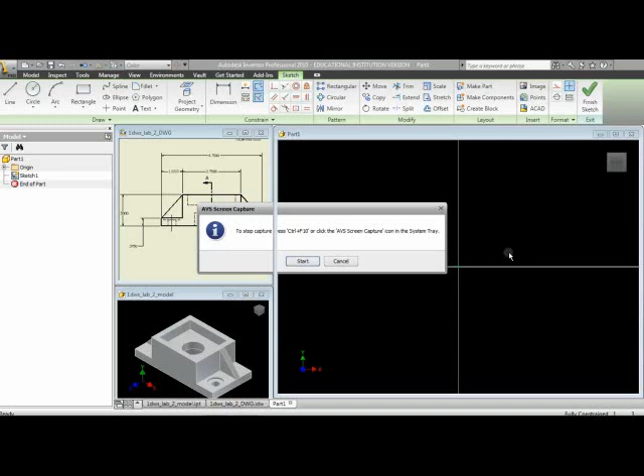Okay, we're going to start Lab 2 here. We'll go over the holes again and also go over the extrusions. Then we will also learn to put ribs on parts, like these features down here known as a rib, so we'll apply those as well. When doing the holes, we'll do spot-faced holes and counterbore holes, looking at a couple of different applications.

First, we want to create an extrusion to define the overall shape of the parametric solid. I've highlighted this green face, and you can see the dimensions for that in the drawing right here. So we'll go over to the drawing and start that sketch.

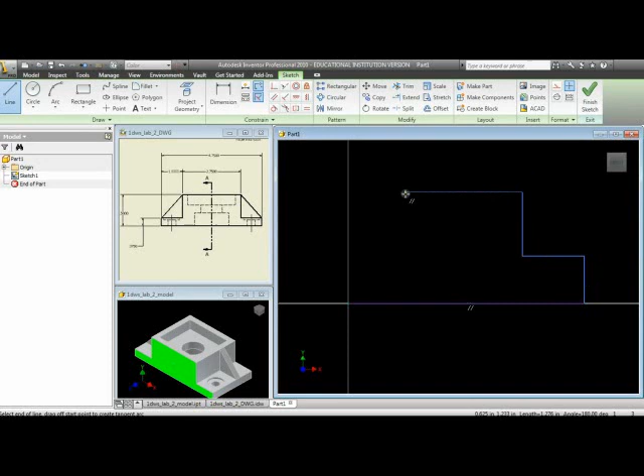I'm going to go to the line command. Again, make sure it contacts that model origin. We're simply going to come up with the shape of that green face that we've got highlighted there, not worrying about the size and shape too much. We can control that as we go.

I'm done sketching, and we've got the two magenta lines. That means they are fixed at that model origin.

So next we'll do some dimensioning. Usually it's best to start with the longer dimensions and put them in first so you don't lose the shape of your part. Note that's 4.75.

And we'll go in there then and put in a dimension here on this left-hand side of 0.375.

The overall height of this thing looks like it's going to be - I believe that's actually 1.5 inches, from this line to this line. And again, you don't have to type in the zeros after that 1.5.

We do have a discrepancy here, we'll address that in a minute. But we're still dimensioning. From this line to this line, I believe it says to make that 1 inch. And then the length of this portion of the model is 2.75.

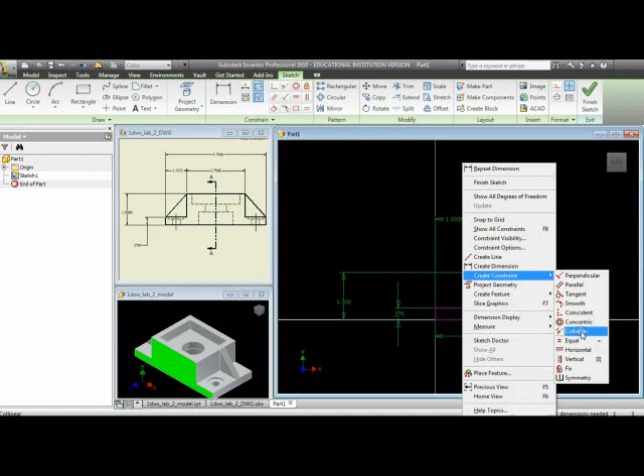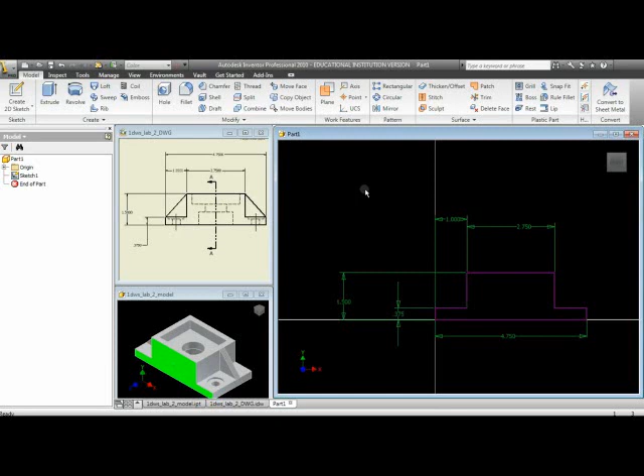Okay, and we're done dimensioning. Now notice at the very bottom right hand corner it says 1 dimension is needed. Again, we could put the dimension from this line to this line in, but I think the best thing to do here is create a constraint of collinear between this line and this line, so that those two lines will change together when we change this dimension if that's needed in our design.

So that's the general shape of that sketch. We'll simply finish the sketch, and I'm going to go F4 and rotate this thing around so you can see it a little bit.

And I will extrude. Now, the profile is already picked because it's the only profile that we have on this model at this time, so you don't have to bother picking that when we do the very first profile. What we do need to do is tell it how far back this needs to go.

And let's see, according to the drawing, here's our number right here: 2.375 is the depth of this piece. So we'll come back over here and we'll insert 2.375.

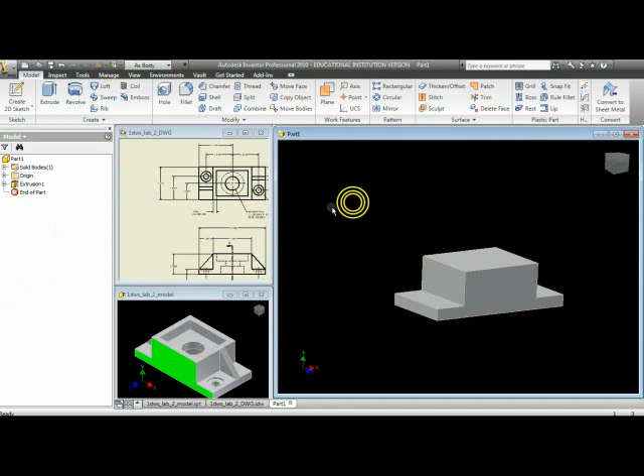And I'm going to flip the direction on this. It's coming out away from my original sketch plane, and I personally like to see it go back that direction so that I can look right at that plane that I created. And I'll simply hit OK.

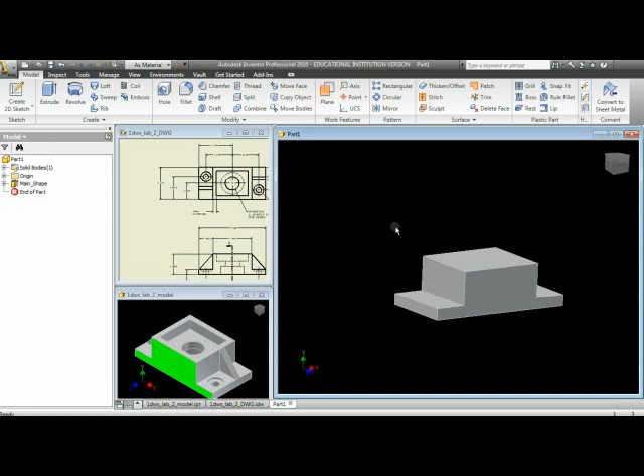And we can see up here in our browser that we have created an extrusion. Now, earlier in Lab 1, I did tell you we could change the names of those. So if we click on that twice, we can change that from extrusion 1 to, let's just call it main shape.

And we could even go in and change sketch 1 if we choose to. I'm not going to do that at this time, but it does help that sometimes you make those changes so you can keep track of different areas that you're working on.

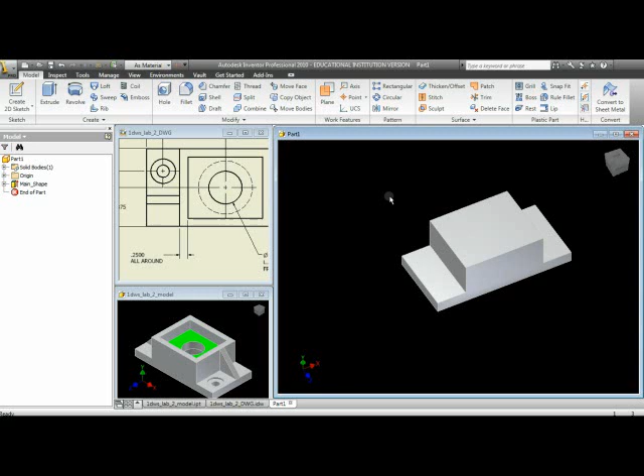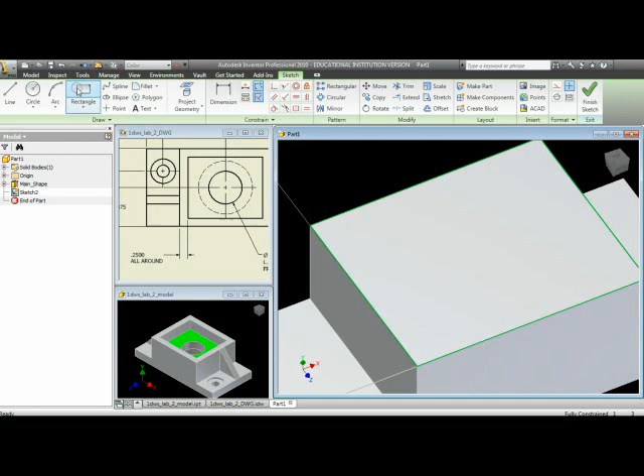Well, we've got the general shape of this created. Now we might want to go in here and cut out this area with that rectangular shape in it. So if we want to do that, we'll note on our drawing that we've got, if you will, a ledge 1/4 of an inch all the way around.

That's exactly how we're going to approach this particular method. We're going to go in there and create a sketch. So I'll hit create sketch and pick the face, and our X and Y coordinate system will come up on that.

Okay, with that then, what I want to do is insert a rectangle this time. Now we have different rectangles, we can do 2-point or 3-point. I think it'll be just as easy to do the 2-point here, and we'll just define the 2 diagonal corners. Keep in mind, I could have done that with 4 lines.

However, what you see with this is if I drag that, when I change my dimensions on this, it will update the whole rectangle at one time. You know what? I'm sorry, I made a mistake there. That is not what I want to do on this particular application.

I'm going to back off of that, so I'll hit undo and get rid of that. I'll keep the sketch, but what I really wanted to do here, I apologize for that, is the offset command. With the offset, notice I've got these 4 edges that it creates automatically. I'm going to grab that and bring that in, and now I have another set of lines. The reason I do the offset is when I change one, they'll all change.

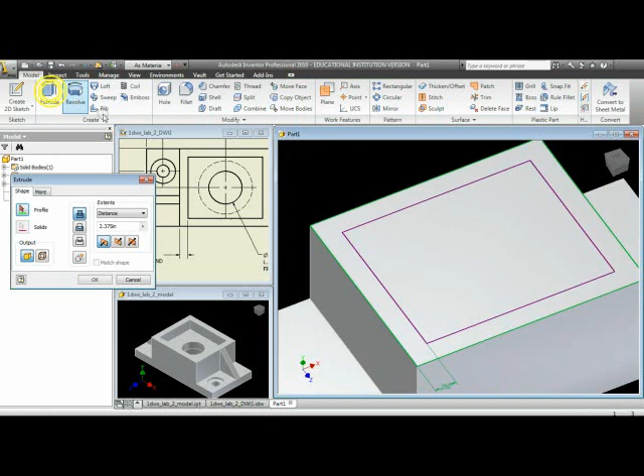So I think there's an advantage there. What we need to do now is put in a dimension from this line to this line of 0.25. Note now that all of those edges are 0.25, so it won't even do me any good to put a dimension here. It'll tell me that that's going to have to be a reference dimension. But notice it was 0.25.

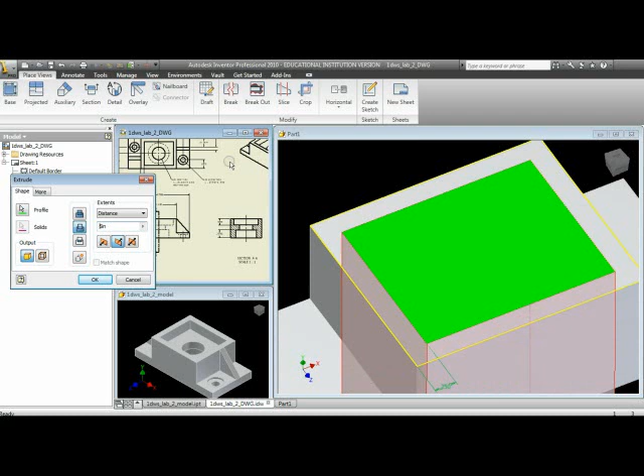So that's the advantage of using the offset command here. I've got the 1/4 inch all the way around by putting in one dimension. If I'd have done that with that rectangle like I had done originally, I would have had to put dimensions all the way around this to control those. So that's probably not advantageous. It's much more advantageous to do this offset that we just did right here.

So I'm going to finish the sketch. I'm done dimensioning, I'm going to finish the sketch, and I'm going to extrude. I have to pick this center piece here for the profile, and again I want to cut. It remembered the 2.375 here from our last extrusion.

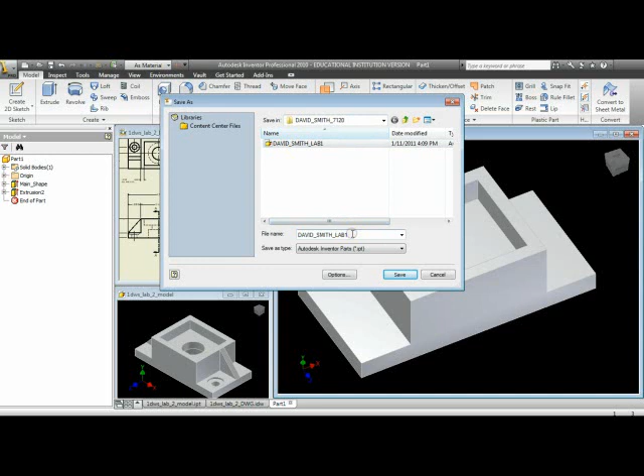Now, we don't want to make that go that deep. We want to actually go in there, and looks like that's going to be a 1/2 inch deep. If we zoom out here a little bit, we'll note that that cutout for that rectangle is a 1/2 inch. So we'll go in.